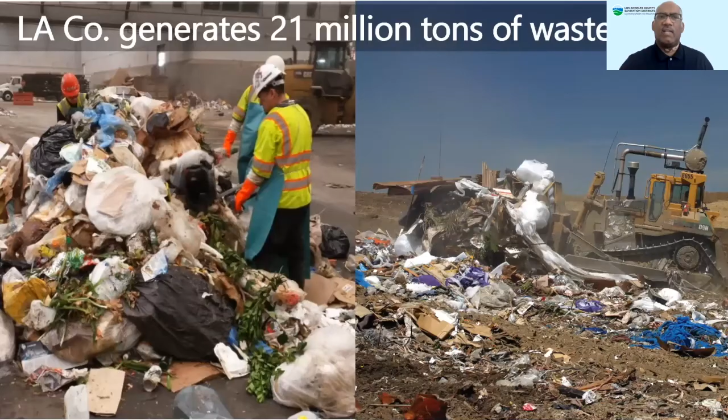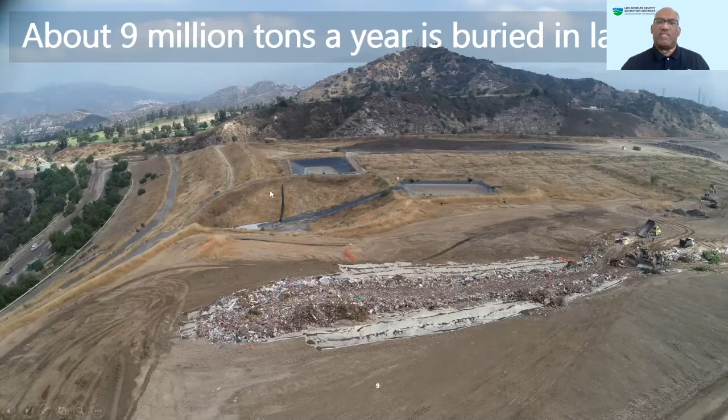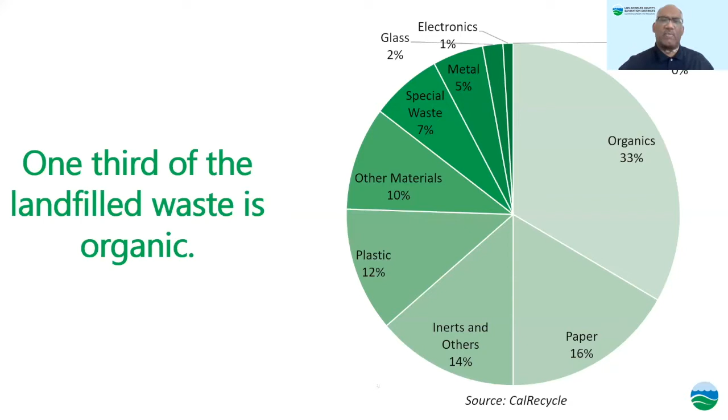And that's why this food waste recycling thing fits neatly into what we can do. So let's backtrack. Why is food waste a big issue? In LA County, we generate 21 million tons of waste per year. Of that 21 million tons, about 9 million a year is buried into landfill, as you see here. Of the 9 million tons per year buried in landfill, about a third of that is organic waste, as you can see from this pie chart from CalRecycle. Of that organic waste, about 4,000 tons per day is food waste, thrown out in LA County. Here's a shot of food waste at our Puente Hills Material Recovery Facility.

That food waste, when disposed of in landfill, can release methane into the environment. There have been some studies recently looking at the planet, and they realized that food waste by itself generates about 6 to 8% of the methane in our atmosphere. Methane is a greenhouse gas that is far more disruptive than carbon dioxide. Some estimates have it at 50 to 80 times more disruptive in terms of climate change than carbon dioxide.

So California, taking the lead, has passed a number of laws, but we're going to focus on two. One is AB 1826, which requires mandatory commercial organics recycling if an entity produced at least 4 cubic yards of waste per week. But last year, because we weren't meeting the targets, that number was lowered to 2 cubic yards of organic waste per week. So if you're a business or any entity that generates at least 2 cubic yards per week of organic waste, you have to have a mandatory organics recycling program.

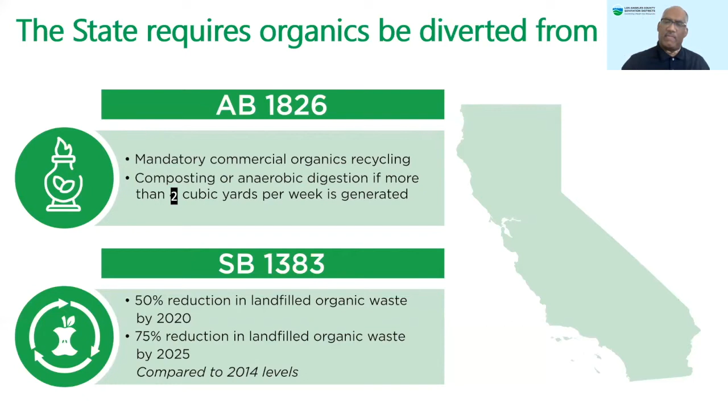And the second law is SB 1383. This requires a reduction in landfill organics by 50% by last year, 2020, and we didn't meet those targets. Then a 75% reduction in organics that are landfilled by 2025. Part of this law requires that all cities in California, all jurisdictions in California, have in place by January 2022, less than 12 months away, an organics diversion, food waste diversion program. What the state's trying to do is move organics away from landfill to either composting or anaerobic digesting. In terms of food waste, if it can be donated to a food bank, that's the best thing to do. And what cannot be donated, they want to make sure it's either composted or anaerobically digested. So the districts are perfectly positioned with our wastewater side and solid waste side to help our member cities and businesses meet this.

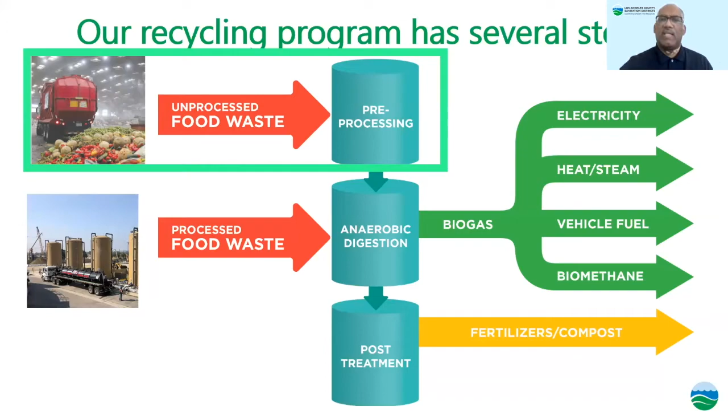Let's take a look at source separated food waste. This is collected from restaurants and grocery stores, and we're looking for material that's at least 90% organic, 90% food waste. That's the ideal stuff we need and will collect.

A hauler will collect source separated food waste and bring it to our Puente Hills Material Recovery Facility. They pull up to one of the scales and pay about $70 a ton. If you enter into some type of contract with the district, we could negotiate a discount as low as $60 a ton.

Can you briefly go over what anaerobic digesting is? Basically, anaerobic digestion is when microorganisms that live in an oxygen-free environment start thriving. You get those in the belly of a landfill or in our stomach. Those microorganisms take over, consume the organic material, and give off gas such as methane and CO2. I'll explain more as we go further along. Thank you for the question, Genesis.

You pay your tipping fee at the scales, drive into our MRF, and a truck goes in. On the left you can notice baled recycled material, baled commodities we've pulled out of the waste stream. We can also pull out green waste, and whatever we can't pull out, we bale up, put back in trucks, and landfill. One of the newest things, which we've been doing for 5 or 6 years, is to the right we have an area designated for source separated food waste, where we now process that into a slurry.

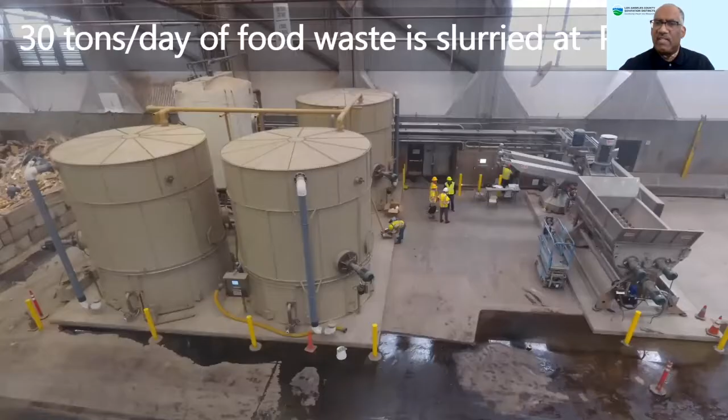And here's what everyone came to see. This is our area designated for food waste. This is our Doda system, where the food waste is fed in and converted into a slurry.

Presently we're taking about 30 tons per day of food waste converted into a slurry. This facility can handle up to 165 tons per day of food waste.

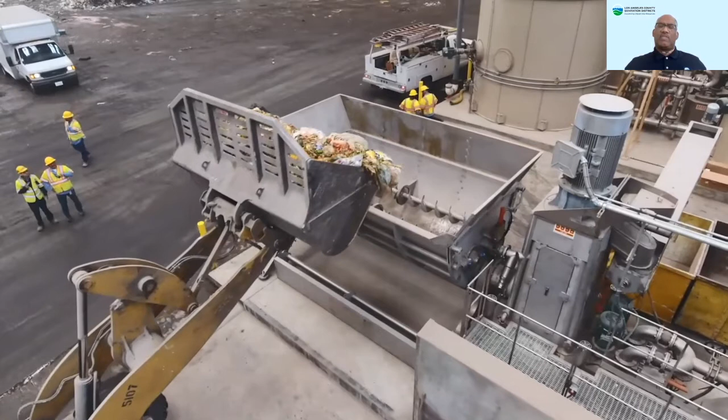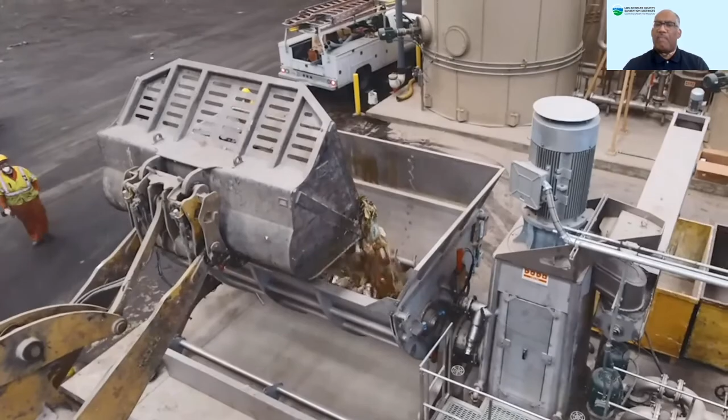Let's look at some inaugural video of the food waste Doda system. Even though this is source separated food waste, you can see there's still contaminants in there. It's loaded into a hopper, which feeds into these bioseparators. Think of them as motorized garlic presses. The material is fed into this chamber and squeezed through openings, almost like a garlic press.

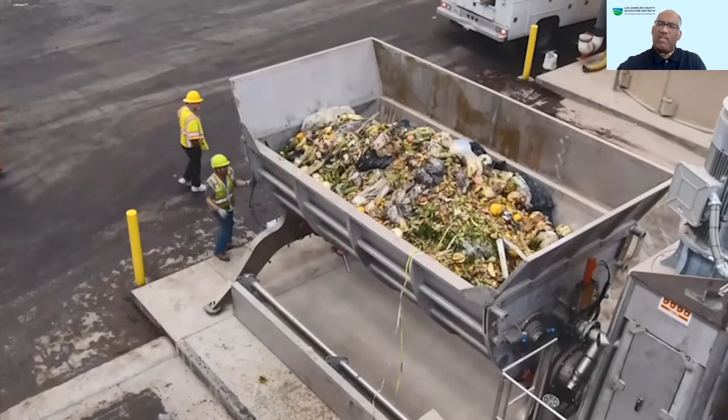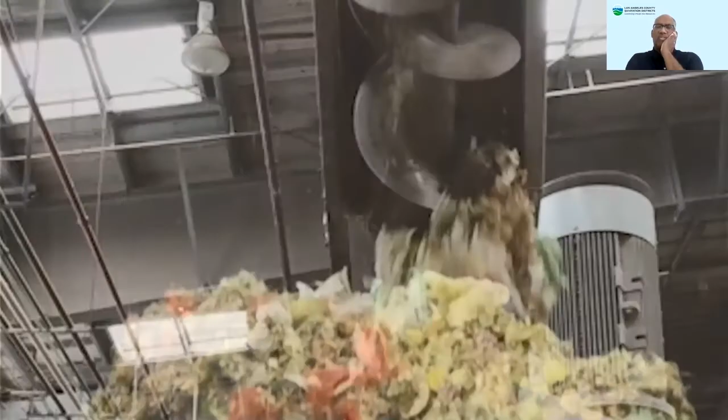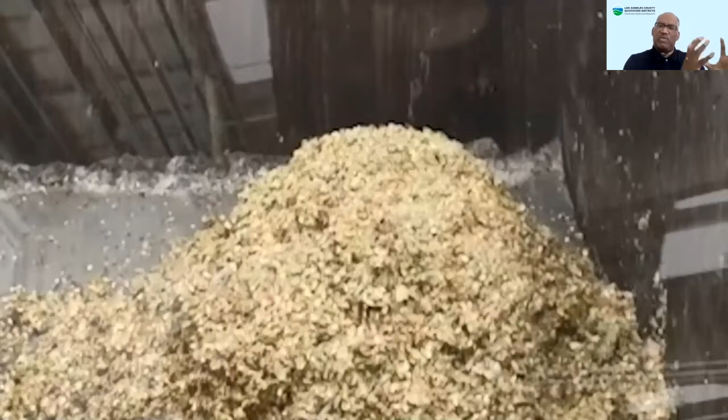On one side of the opening, the organic material will come out, and what's left will be the plastics and things that won't break down. You can see the rejects coming out here, the big pieces of plastic. Then there's a second bioseparator that the slurry from the first goes through, with even smaller openings. Here's the rejects from the first bioseparator, the plastics and maybe forks that made it in there. And then we'll see the finer rejects from the second bioseparator. So after it goes through these two kind of motorized garlic presses, this is the good stuff.

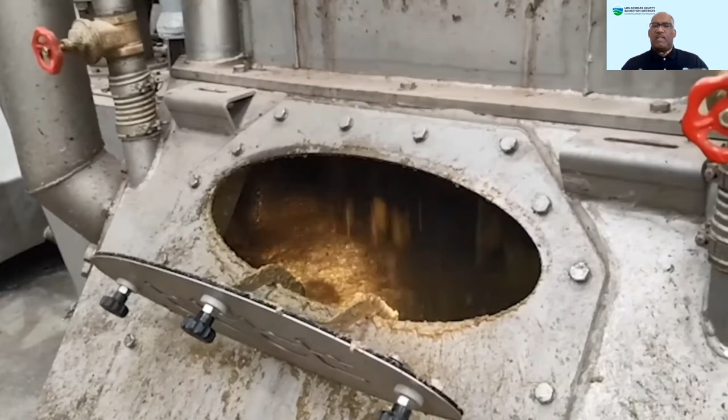Here's what the food waste slurry looks like. Typically, just by putting it through the bioseparator, our motorized garlic press, we get that kind of slurry consistency. But let's say the slurry is too dry, we can add water. We have a tank here that can supply water if we want to liquefy it a bit more. So once we've created the slurry, we store it into three large containers.

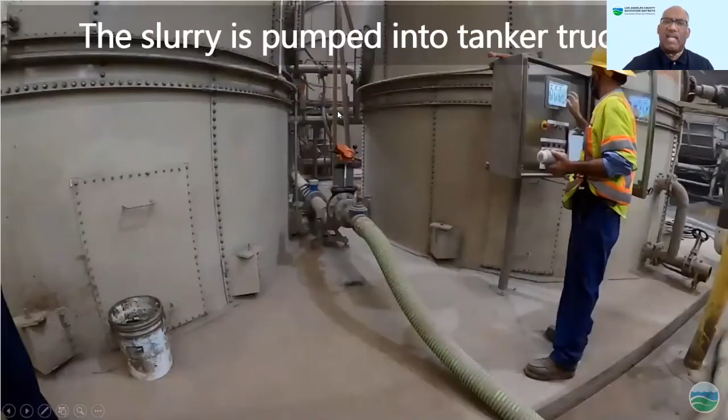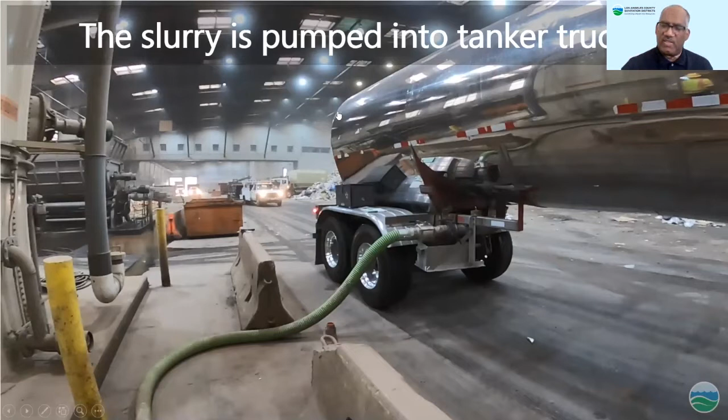From there, a tanker truck operator comes periodically and collects the slurry. You can see in this driver's hand he has a sample of the slurry, because every time we put it in our tanker truck to take to our plant in Carson, we take a sample so we can make sure we understand what we're putting in our digesters, because we do not want to upset our digester.

Once it's offloaded, it feeds into what we call anaerobic digesters. I'll show you aerial footage of the anaerobic digester. So it gets put into the digester, and the microorganisms produce biogas that we use for electricity, steam, vehicle fuel, and methane.

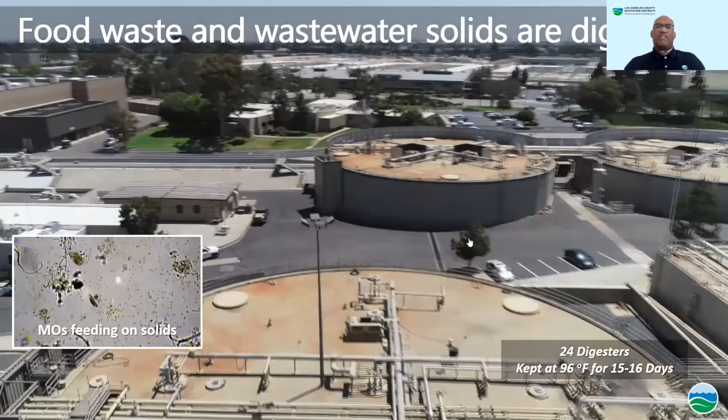Here's an aerial shot. Here are the digesters right here. They're set up just like our stomach. You have microorganisms that live in an oxygen-free environment, and they consume that organic material, and that's anaerobic digestion. Those microorganisms give off methane and CO2.

We mix that food waste slurry with wastewater solids. Part of the wastewater treatment process removes solids from the wastewater, and those two waste streams are mixed in the anaerobic digester. After about 15 to 16 days, we remove what's left, and we also generate biogas.

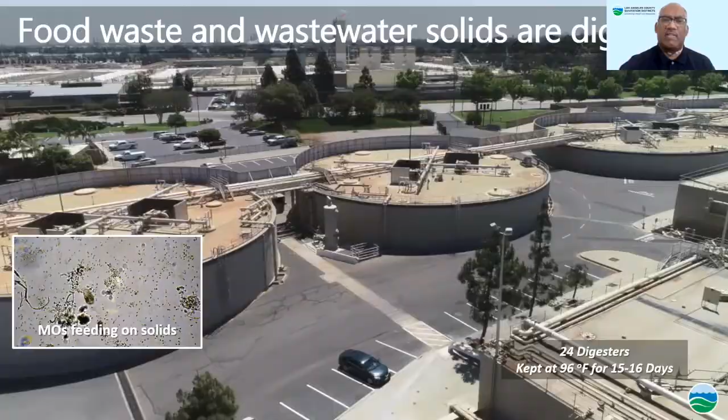So this is an inside look at our digesters. We have about 24 digesters, about 50 feet in height. Most of the digesters are underground, but to give you an idea of how big they are, notice my cursor — this is a 6-foot board right here. So you have about 10 to 20 feet of the digester above ground, and the remaining, most of it, is below ground.

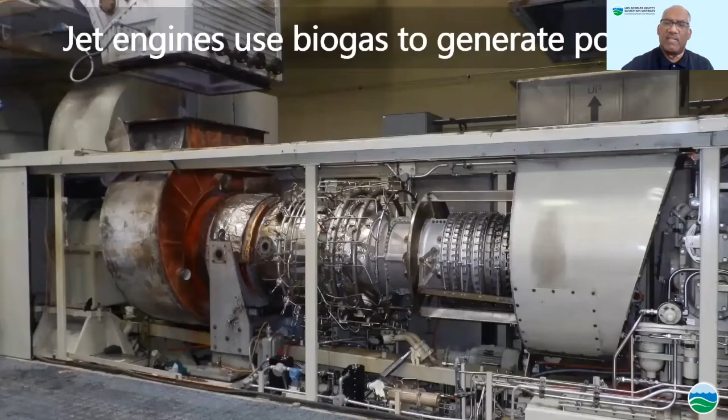Now the biogas produced by anaerobic digestion goes into jet-type engines, and that generates power. The steam from this process is also used to generate more power. All the power generated from the biogas is generated at our own power plant, which we call the Total Energy Facility. Here's an aerial shot of it.

It's a 20 megawatt power plant, and basically this power plant runs the joint plant. The wastewater treatment plant is essentially energy self-sufficient because it runs off the biogas produced from the digester. The reason it's not 100% energy self-sufficient is that from time to time we have to take the power plant down for maintenance. If that weren't the case, this plant would be completely energy self-sufficient.

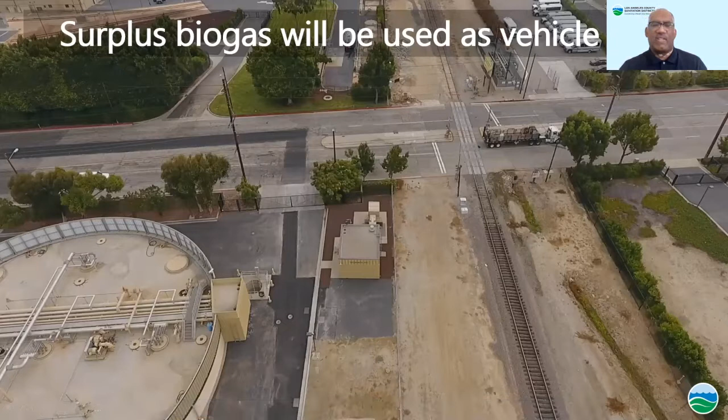As we get more and more food waste into our system, either food waste slurry, we're producing more biogas than we can use at our power plant. So what we've done, starting last November, is clean up that biogas to create vehicle fuel and sell it at a gas station we have at the corner of Sepulveda and Figueroa.

I'll show you a quick aerial. You'll notice a digester right here, and you'll see the alignment of the new underground biogas pipeline. As we go north on Figueroa, notice the digesters right here. It's going to go to what we call a biogas conditioning system.

This system right here takes the biogas produced from the digesters, which is about 60% methane, and brings it up to over 90% methane concentration. That now makes it vehicle fuel, renewable fuel.

We store it in this tank, and then from there it feeds to the existing gas station.

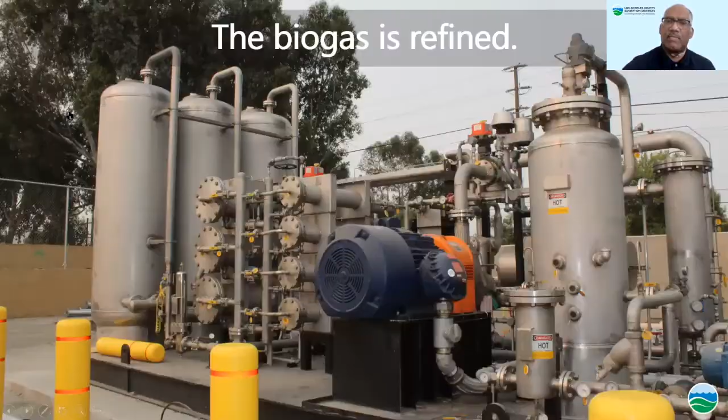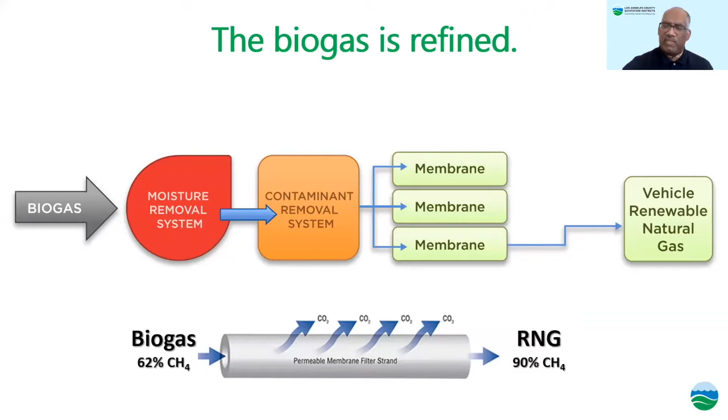Here's a ground shot of the biogas conditioning system. You can see how it goes from 60% methane to 90% methane. It does moisture removal, contaminant removal, and then removes the CO2. We just want as pure as possible methane, or natural gas.

We're partners with a company called Clean Energy. Historically, this compressed natural gas station was fueled by the natural gas pipeline. But starting in November, we started bringing in biogas generated from food waste at this fueling station. At some point in 2021, this fueling station will be completely fueled by biogas produced from food waste.

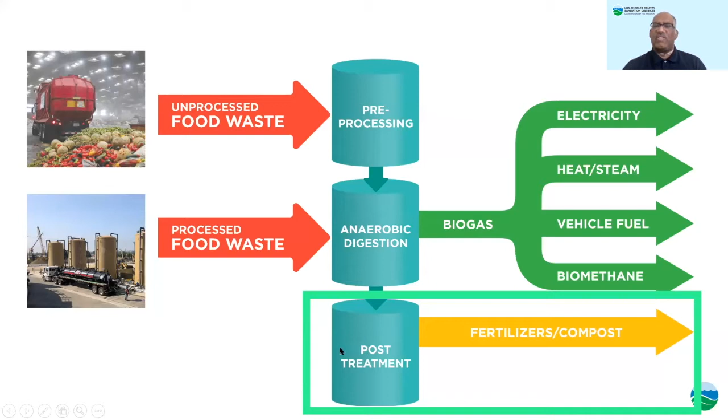So then the last step is the solids left behind in the digesters. What do we do with it? After 15 days, the digested solids are taken out. When they're taken out of the digester, they're about 2 to 3% solids, and most of it is water.

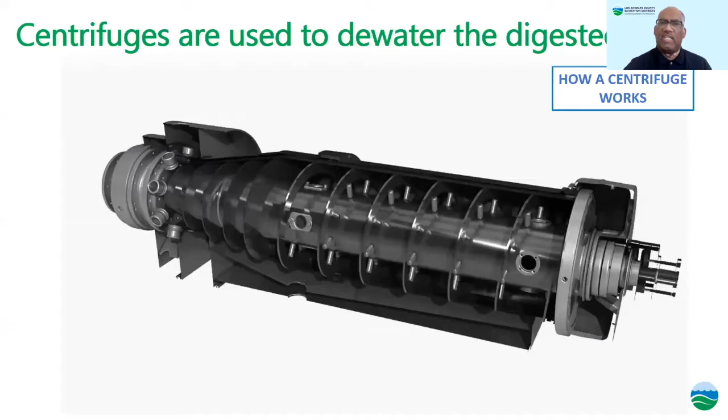We don't want to truck all that water off site - it's money, it's energy. So what we do is dewater it using a centrifuge. We take the leftover material from the digester and spin it, almost like a spin cycle, and it takes it from about 2 to 3% solid to 30% solid. That greatly reduces the amount of biosolids we have to take off-site.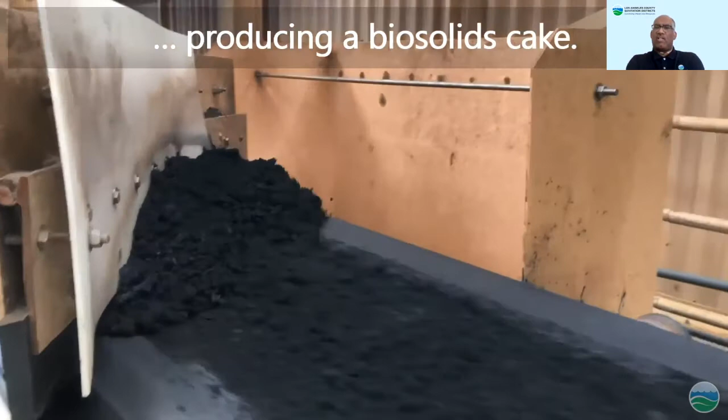Then we load the biosolids into trucks. Most of our biosolids we compost with agricultural waste and turn into a soil amendment.

So how are we doing at the joint plant in Carson? The plant is taking about 300 tons per day of food waste slurry. We have about 8 haulers bringing the food waste there. You can notice we had a bit of a COVID dip, but it's starting to inch back up.

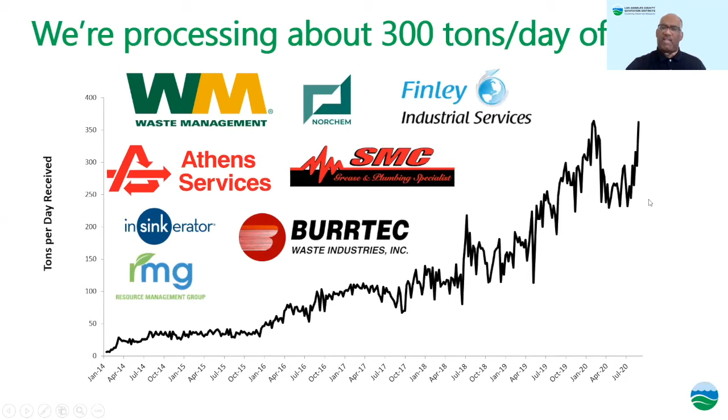We're currently producing the equivalent of about 2,000 gallons of gasoline from that 300 tons per day of food waste slurry. We can build out this system.

Our infrastructure can handle up to 600 tons per day. When we get to 600 tons, we should be generating the equivalent energy of about 5,700 gallons of gasoline per day.

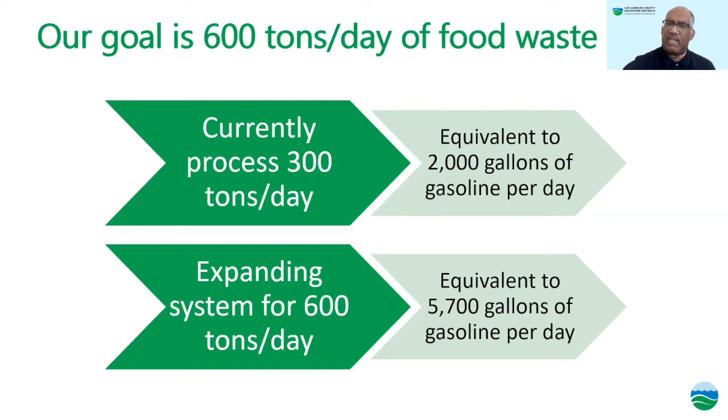So as we build out and get more and more food waste, we're going to continue to produce electricity and completely fuel our existing compressed natural gas station with biogas from food waste. As we get more food waste than the power plant or the CNG station can handle, maybe down the road we would look into injection into the natural gas pipeline.

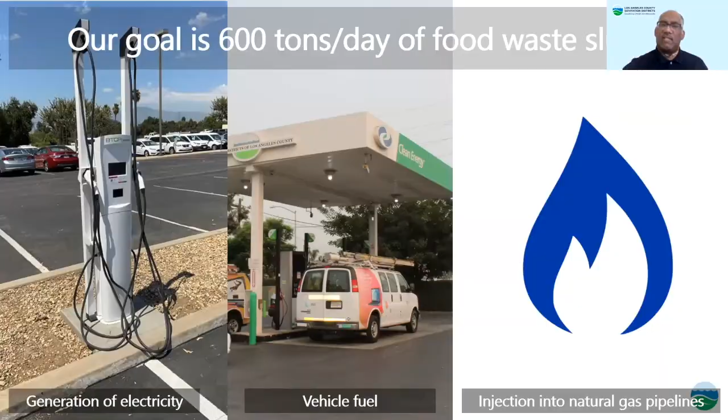That's all I got. Are there any questions? I was hoping we'd have questions as we went along.

Genesis, any questions? So far, none. You've left us all stunned. Oh, I bored everyone. No, I have one - just came in.

Thank you, we love questions, and keep them coming. We love your questions. We'll turn on your camera. Yeah, you did. Yeah Basil, I think you covered everything, good job.